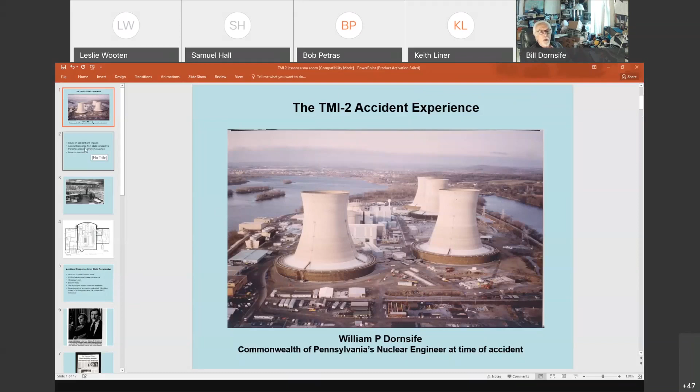What I'm going to cover is the cause of the accident, the accident response from the state perspective, and personal stories from my involvement. I could talk for hours. It's amazing how, with things that were traumatic in your life, you remember exquisite details of that experience. And I swear that when I don't know the names of my wife and children, I'll still remember what happened at TMI. And then finally, I'll go through some lessons learned.

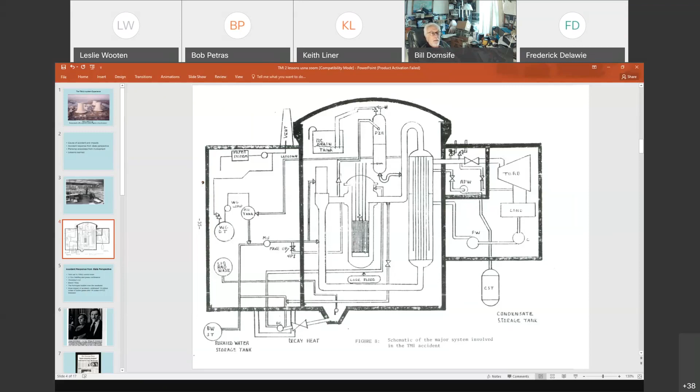Again, the hydrogen bubble went away, and it was reported to the press and the public that it was no longer a concern. I think it's important to note that on Thursday evening, the accident, the immediate concern about the plant's status was really over when they restarted the reactor coolant pump.

And nobody was really aware of the amount of core damage that had occurred. There was concern that there probably was core damage, more in the nature of clad failure, and I thought this too, because when the reactor coolant pump was restarted, the system behaved as you would expect it would. Not as if there was a large amount of core damage.

There was a lot of offsite monitoring going on by both the Met Ed folks, us, and other groups that came in, including DOE and EPA. Based on the measurements, it was estimated that about 14 million curies of noble gases were released. And luckily, only 14 curies of iodine were released.

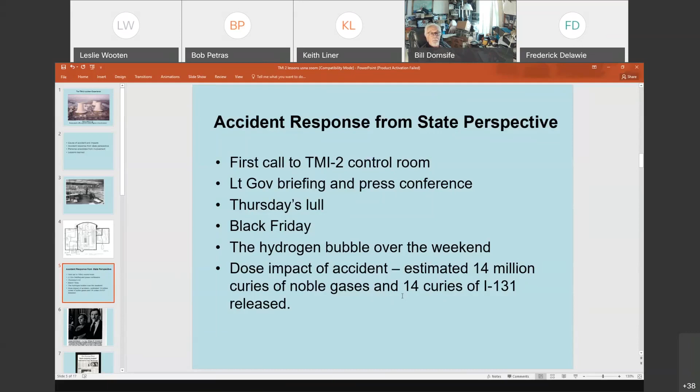The local media and the local radio, I think, did a pretty good job in terms of putting out factual information based on what they had. I think maybe because they were more affected by what was going on, but they did a pretty good job.

One of the biggest issues was communications. In the beginning, everybody was trying to communicate with the press, the state, Met Ed, and the NRC, and there was conflicting information being given out. That changed when the NRC arrived and Harold Denton became the only spokesman for what was going on at the plant. For those of you that know Harold, he had a very calming voice, a nice southern drawl, and he did an extremely good job in terms of communicating with the media.

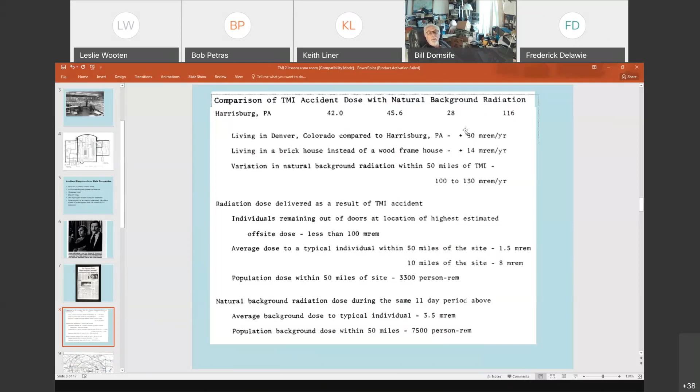Just to give you some perspective on the TMI dose compared with natural background, the total natural background in Harrisburg is roughly about 116 millirem per year. Living in Denver, because of altitude, adds another 30. Being in a brick house compared to wood, another 14. All of these are without radon, of course. They're just terrestrial and cosmic radiation. There could be a variation of 100 to 130 millirem per year within 50 miles of TMI.

The highest estimated dose of anybody remaining out of doors for the entire duration, which for this report was 11 days, would have received less than 100 millirem. I think it was actually calculated to be 85 millirem. The average dose within 50 miles of the site was about 1.5 millirem, and within 10 miles, 8 millirem.

The total population dose within 50 miles was 3,300 person rem, and natural background radiation during this same period would have given 3.5 millirem. So you can see, the dose from TMI was well within the uncertainty in, or the variation in, natural background radiation, and within 10 miles was about, let's say, 3 weeks worth of natural background radiation. Population dose within 50 miles was 7,500 person rem.

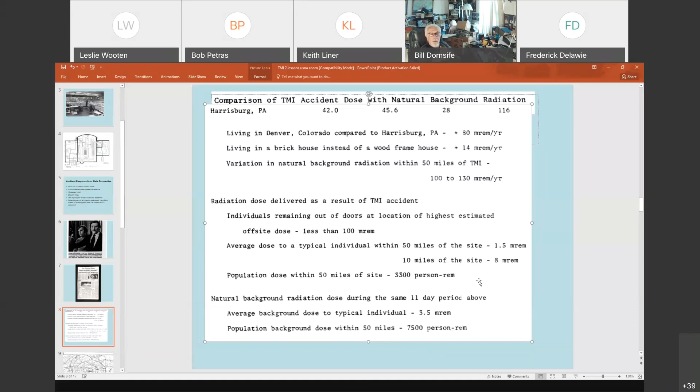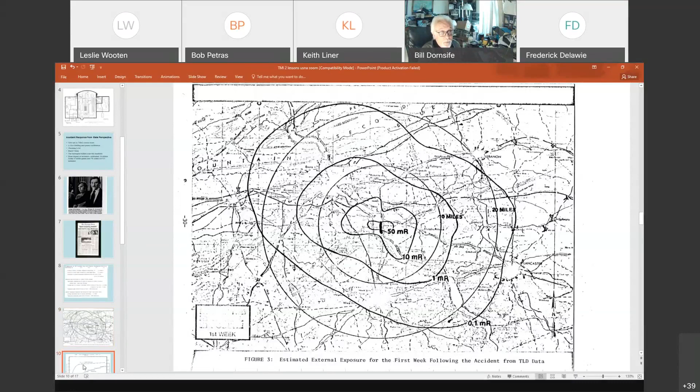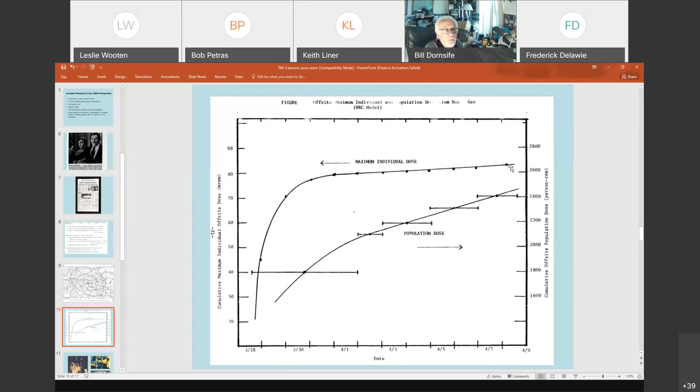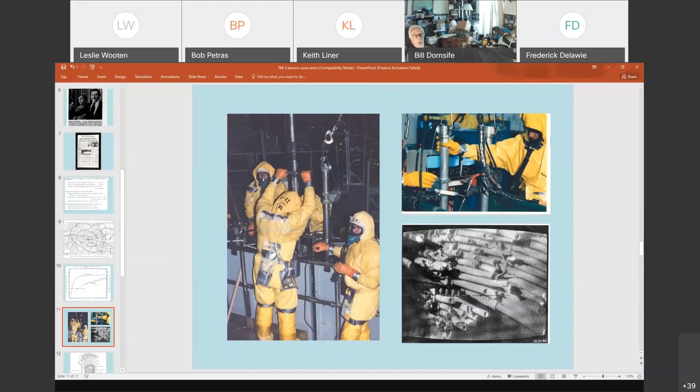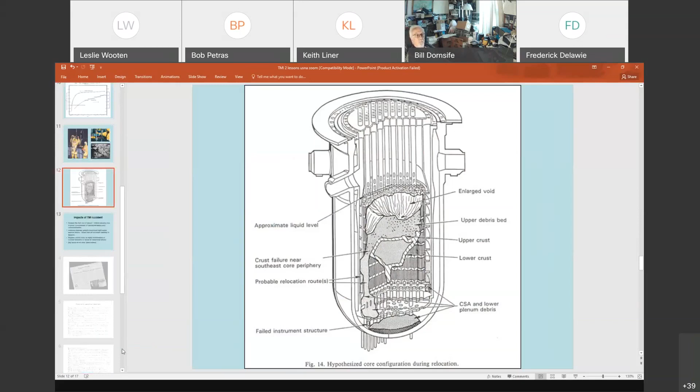I never thought that you could do this much core damage and not have a melt through and a containment breach and just incredibly terrible accident consequences. So, amazingly, with this much core damage, the impacts were relatively minimal. I think the main issue, we scared the hell out of about 1 million people due to poor coordination of decision making and communication.

Obviously, with that dose, there were no calculated radiation impacts from the accident, but I think there were a lot of mental health impacts that are very difficult to quantify. There were numerous studies done that confirm that in fact there should have been no health effects from the accident. The lessons learned greatly improved light water reactor safety. I think that was one of the primary benefits of the TMI accident.

Before that, there was an accident waiting to happen. When I was visiting the other plants as the state's nuclear engineer, there was a lot of false confidence in the operators that nothing could ever happen, and it was a very big concern. So this obviously changed that attitude and made reactor safety a lot better. And obviously, since then, we've never had anything near an incident that really released a lot of radiation.

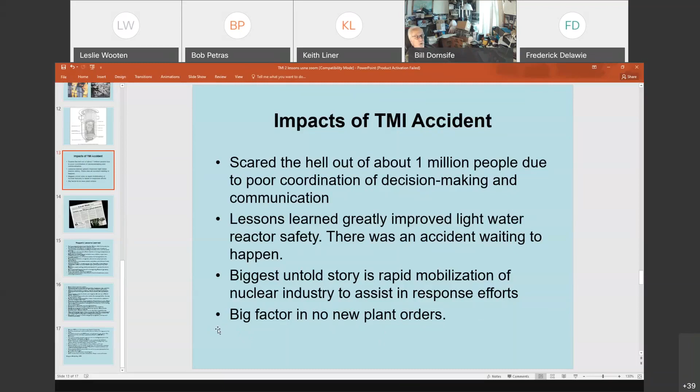One of the biggest untold stories is how the nuclear industry responded to the accident to assist in response efforts. Also, a lot of industry organizations that hadn't been in place before were formed, and that greatly improved the safety of the plants. Procedures were revised. A lot of areas were improved. Obviously, it was a big factor in no new plant orders, and then when plant orders started, the Fukushima accident put a kibosh on that.

I'm not going to read these, but this is a list of lessons learned that was done by my colleague Maggie Reilly. Maggie and I obviously were key responders. She was primarily on the radiation side. I was on the nuclear safety side. But Maggie had kind of a weird sense of humor. So you can see some of these are kind of humorous, but they are in fact very true. I assume you will be getting a copy of this presentation, and you can read these at your leisure.

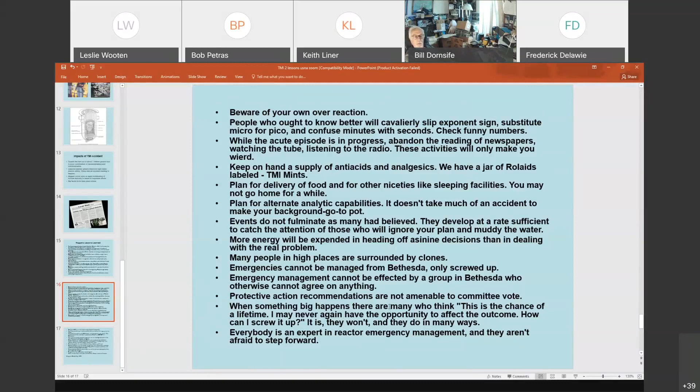But let me pick one out here. Yeah, here's a good one. Protective action recommendations are not amenable to committee vote, meaning the NRC. And here's another one right below it. When something big happens, there are many who think this is a chance of a lifetime. I may never again have the opportunity to affect the outcome. How can I screw it up? It is, they won't, and they do it in many ways.

Bill, that was just fascinating. Yeah, this is Scott. I got a couple of questions. Since TMI and throughout my career, we've both worked for the NRC for many years. At the time of TMI, the NRC had only existed for just a few years. And I've seen the industry as well as the regulatory staff and bodies mature considerably, embrace lessons learned. We at Savannah River have taken the events that took place at TMI, and we talk about that frequently as part of our nuclear safety culture. I think it's really important to gather these lessons learned and to learn from past mistakes.